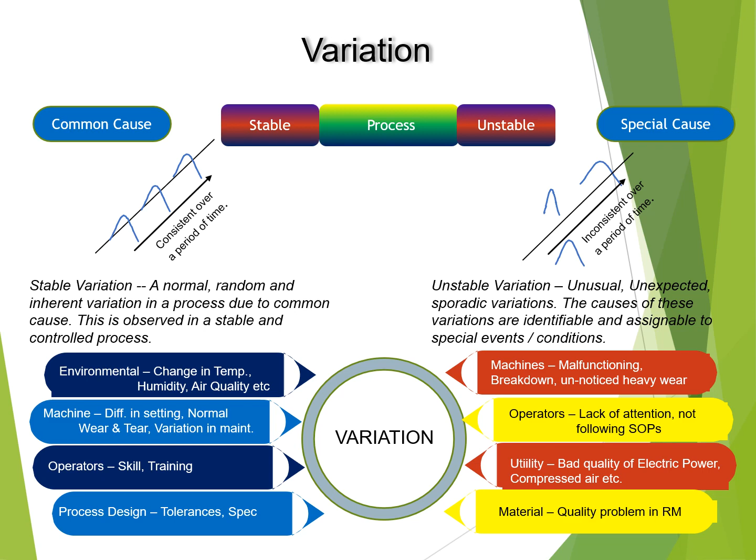So how to identify the variation? The variations are identified by statistical process control, which is used to monitor and control a process. Here we first collect the data. We have to make sure that the data is accurate and represents the complete process. Then we make a cause and effect diagram. This is also known as a fishbone diagram because of its shape. In this we select the output which is deviating from the desired outcome. Then we categorize the potential causes for this deviation into 5 M's and environment. The 5 M's are man, machine, material, method and measurement.

These are the 5 M's. After this we make a Pareto chart. This chart is to identify and prioritize the sources of variability. It is also known as the 80-20 rule, which states that roughly 80% of the problems are due to 20% of the reasons. So you take action on these 20% of the reasons and you will solve roughly 80% of the problems.

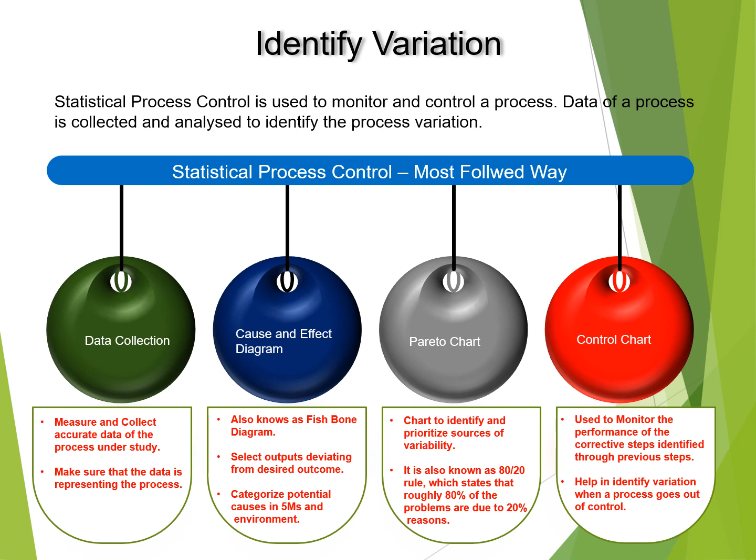Now, what is a fishbone diagram? This fishbone diagram is also known as the Ishikawa diagram, named after the gentleman who invented it, or cause and effect diagram. So these are the causes and this is the effect. We do the root cause analysis for this. So first, what is the problem? We write it here. After that, as we said in the previous slide, we divide the reasons into man, machine, method, material, measurement, the 5 M's, and environment. And after that, we write the sub causes.

For example, we can write training, or not following the SOP. We can write about the machine wear and tear or maintenance, or we can say for the method that we are not following the SOP, the method was wrong, or we can say the material supplied by the supplier was not correct, or the measurement taken was not correct, or the temperature or the humidity was more, which is affecting. So these causes we write here, and then of course we select what the causes are and how to take action on them.

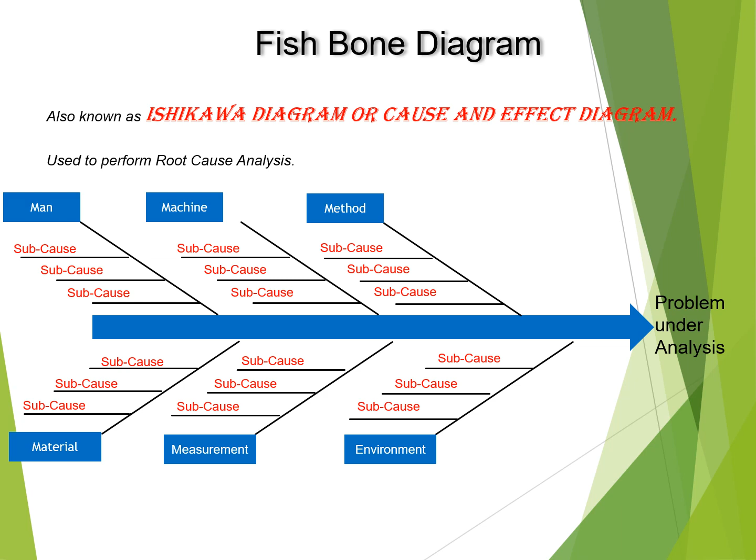This is for the benefit of the people who want to make a fishbone diagram looking like a fish. So once we have made the fishbone diagram and analyzed that, we can make a list of potential causes which are causing the variation. So for example, there were 10 causes which are causing the variations. Rejected quantity against each cause is also written here.

Then we take the cumulative percentage: 380 upon 978, it will be 39%. 680 upon 978 will be 70%, and we go down up to cause number 10. Making this table, we make the Pareto chart. I'll show you in the next slide how to make the Pareto chart in Excel. Just to understand it, you can see that two causes, cause number 1 and 2, are causing 70% of the rejections.

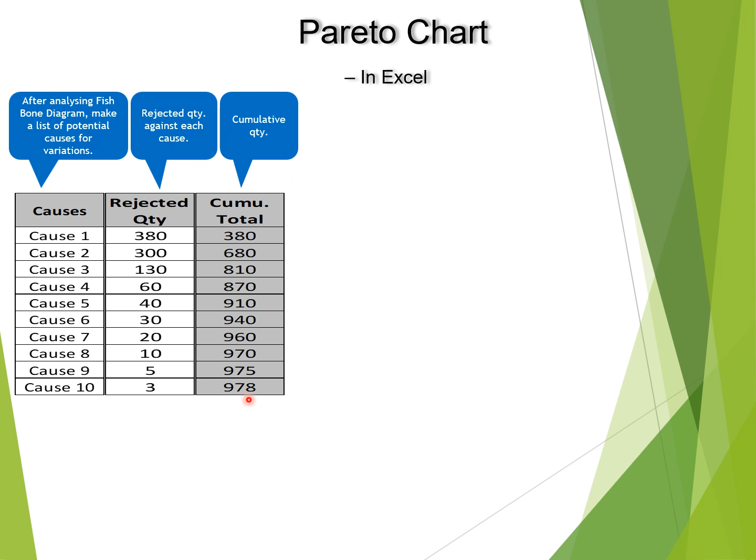So 380 is 380. Then the next one is 680, so 300 plus 380, 680. Then third is 130, so this cumulative quantity is 810: 130 plus 300 plus 380, like this, up to 978. So you can say the total rejected quantity is also 978. And the last column is the cumulative percentage. This we achieve by, say, 380 divided by 978, so 39%. 680 divided by 978 is 70%. So like this.

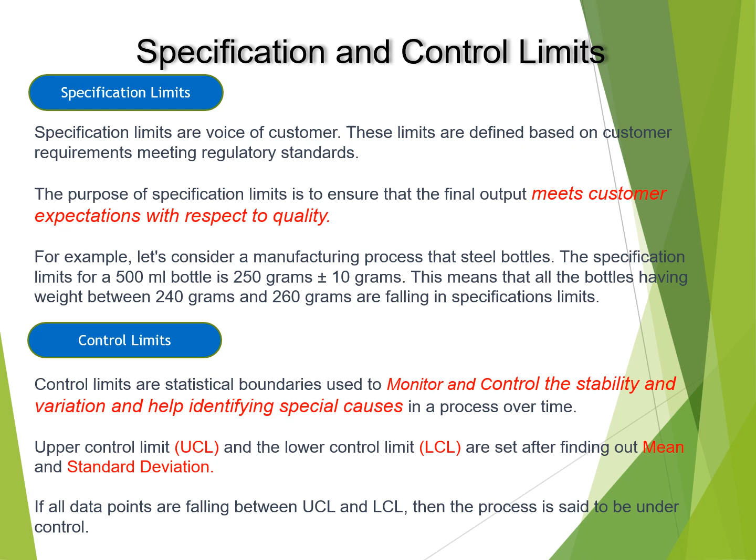Once the data is collected, analysis is done through Ishikawa diagram and the activities are prioritized through Pareto chart. We make control charts. Control charts were invented by Dr. Shewhart in 1920s, more than 100 years ago. These are used to predict the expected range of outcomes from a process and determining whether the process we are running is stable or not. These two are the main objective.

Now, we can have two types of data. One is continuous, second is attribute. Continuous data is having numerical values like 2.2, 2.3, 5, 6, 7, all numerical values. This is a continuous data. Whereas attribute data is non-numerical values that can be classified in yes, no, or good, bad, okay, not okay.

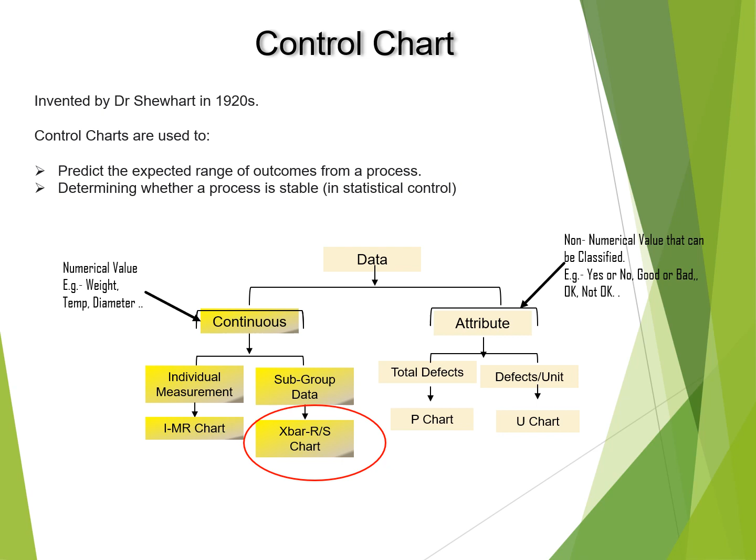And this continuous can be further classified in individual measurement, subgroup data, then this is individual moving range chart, X bar chart. Attribute of course is total defect, and then we make P chart, U chart, C chart. We are in this presentation concentrating only on X bar R chart, which are the most popular in the industries. We will not discuss other charts. Let's understand X bar chart, R chart with an example.

This is an example. We are taking data of 5 samples. These are the samples A1, A2, A3, A4, A5. And we are taking the observation 10 times. First we find the X bar, that is the average. X bar is average of all observation of samples. So these are the samples. When we take the average of this it is coming 3.08. This is the X bar. Similarly, we take the X bar of all the observations and we find out these values.

Then we find out range. Range is nothing but difference between maximum value and minimum value. So here the maximum value is what? 3.11, minimum is 3.05. So the difference is 0.06. Similarly here the maximum is 3.13, the minimum is 3.05, difference is 0.08. We go down further, maximum here is 3.10, minimum is 3.06, so difference is 0.04. Like this we find out the range.

Now further we take the average of X bar. This will be called X double bar now. This comes to 3.08. And when we take the average of all the range, this is called R bar and it is 0.05. Now we start preparation for X bar R chart. To make X bar R chart, we need to know upper control limit, center line and lower control limit. So center line is nothing but the average of average, that is X double bar. This is the center line. So this is 3.08. I have taken one more decimal place. So 3.082 is the center line.

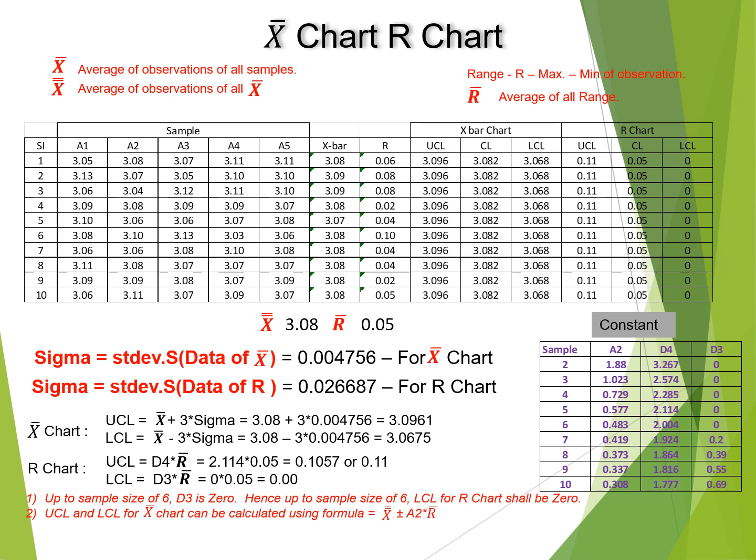Now, how to make X bar chart, R chart? Please be very careful here. Let us filter the relevant data only. Let us take X bar. X bar was the mean of all the observations. Then upper control limit, center line, this was X double bar. Then the lower control limit. If you plot this data, we will find that this data is moving between upper control limit and lower control limit. My upper control limit is 3.096 and lower is 3.068. Mean is 3.082. So all my data are coming between this. This shows that there is no special cause available in my process and my process is in control.

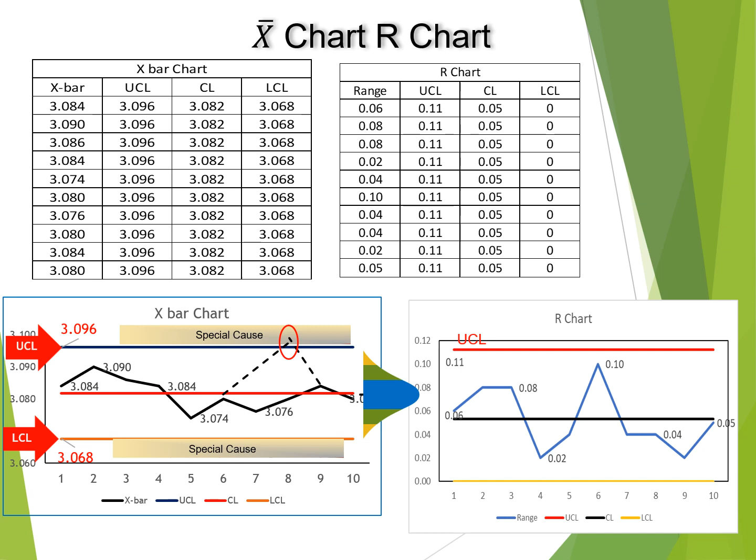Friends, let us understand a few rules to interpret a control chart. Let us assume that this is a mean and we have 3 zones on either side of this mean. 1 sigma, 2 sigma and then 3 sigma. Similarly on the bottom side, minus 1 sigma, minus 2 sigma and minus 3 sigma. So the rules are, if any point is falling outside 3 sigma, whether it is plus side or minus side, then it's an alarm. Or if 2 out of 3 points are in zone 3, whether in minus side or in plus side, that means it has a potential to go out of this zone.

One more rule is that if 4 out of 5 points are in the 2 sigma zone, that is also an indication that the process may go out of control and we need to be careful. 4 out of 5 points in zone 2, whether it is in plus side or in minus side. Then 8 or more points on one side of the center line, whether in zone 1 or zone 2 or zone 3 or clubbed together. If 8 or more points are on one side of the mean, then this is also an indication that something may go wrong.

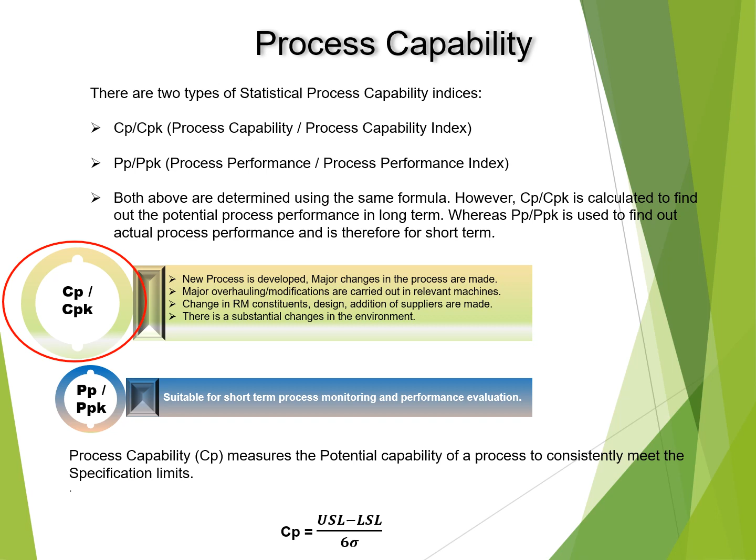Let us take 3 different scenarios to understand process capability better. Let me write the process capability formula once again. CP is equal to USL minus LSL upon 6 sigma. Upper specification limit minus lower specification limit divided by 6 sigma. In all the 3 cases, it is assumed that the process is centered. That means the spread of the data around the mean, right side and left side, is a mirror image. In the first case, CP is equal to 1. If CP is equal to 1, then USL minus LSL is equal to 6 sigma.

Friends, if you recall the empirical rule 68, 95, 99, which says that in the normal distribution curve, 99.75% of the observations fall between plus minus 3 sigma. So if CP is equal to 1, then 99.75% of the observations shall fall between upper specification limit and lower specification limit. We can also say in this case that it is just meeting the customer's requirement, just touching.

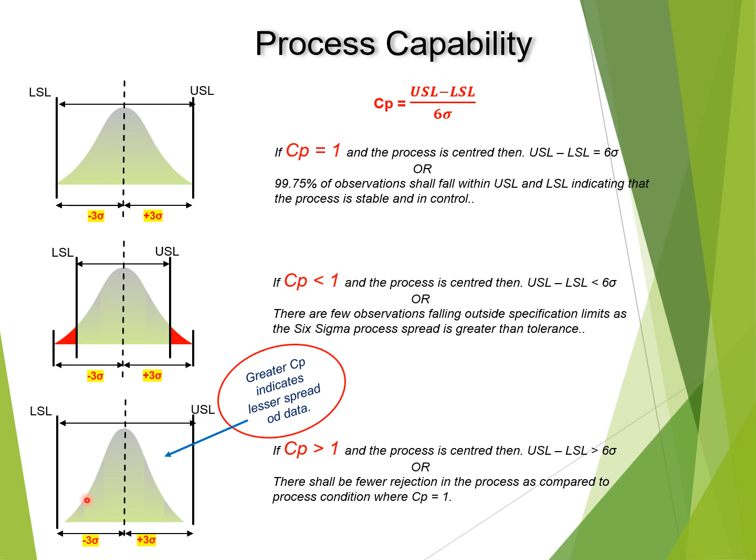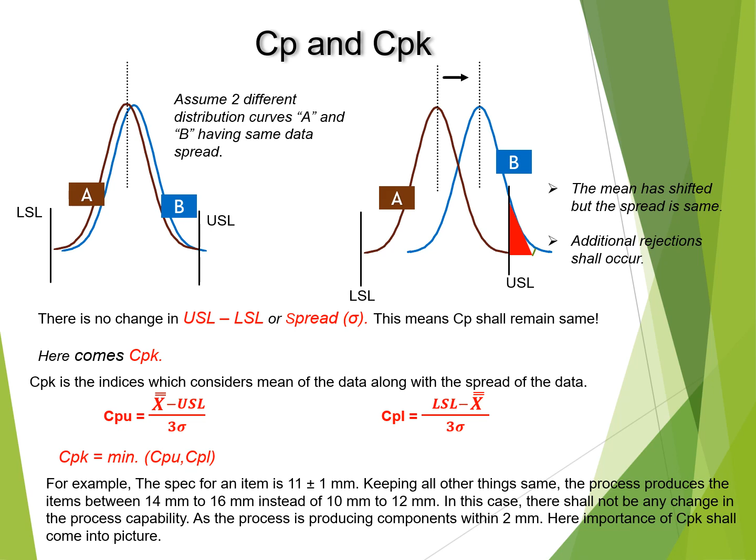Let us do interpretation of CP and CPK with the help of some diagrams. The first one is the spread is touching both upper and lower specification limits, and the spread is always equal to 6 sigma, plus 3 sigma and minus 3 sigma. So in this case, USL minus LSL is equal to 6 sigma. If you go by the formula, CP is equal to USL minus LSL upon 6 sigma. In this case, CP shall be 6 sigma upon 6 sigma, that is 1. So if the spread is touching both USL and LSL, the CP shall be 1.